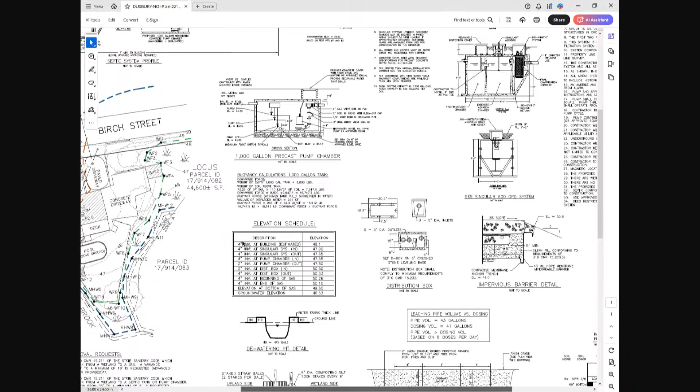Basically, we went out there and did some test holes, 2 test holes here, and got a 3 or 4 minute perk rate. It's relatively sandy material, and so now we're speccing out a singular advanced treatment septic tank right here, and then we're also proposing a pump chamber just to achieve water table separation.

We're proposing some erosion control. And basically the way the system is designed right now, it's a couple feet out of the ground, and we're requesting multiple variances or local upgrade approvals and waivers from both the state code and the local code. If you want, I can read through those individually.

We're requesting a setback reduction for the leaching field to a wetland from the required 50 feet to 19 feet. Just to be noted, advanced treatment and an impervious barrier are proposed. So we will be getting that advanced treatment, and then we have an impervious barrier right here. And it's actually the setback to the chimney — to the actual foundation it's a couple more feet, but to the actual chimney it's 7 feet.

We are requesting a setback reduction from the septic tank to the wetland. The requirement is 25 feet; we are requesting a reduction down to 8 feet, which is this dimension right here. That's also the setback to the pump chamber. Again, this is where the plumbing comes out of the house now — the plumbing goes under the slab. We have no real plumbing options, so we're just kind of stuck with that, unfortunately, so that's where the pipe comes out. By default, that's where we sited the advanced treatment tank as well as the pump chamber.

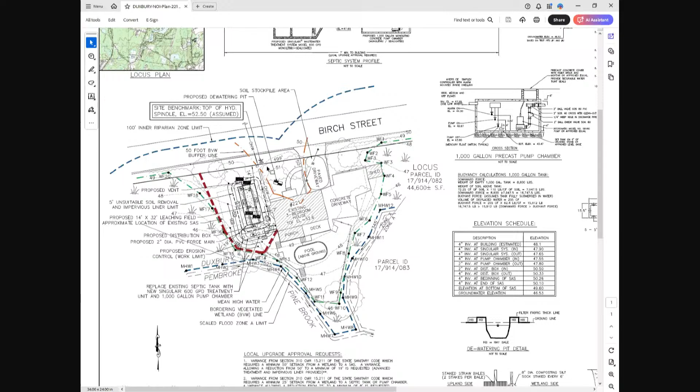I just have one question. Was the existing septic failing, or was it part of a home purchase? No, it's a failed system. The person I'm working for just purchased the home.

So it didn't pass Title V? It did not pass Title V, yes, that's correct. It's basically an old pipe and stone system, this is it here, that dashed line there. So that system doesn't pass inspection, but it's like literally 2 to 3 feet off the wetland. So now we're putting in something substantially better with advanced treatment.

And the other thing is we are going before conservation on Tuesday next week.

Is there anything on this list that you can make more conforming? And if there is, why didn't you? Like I said, the one thing that I mentioned is we are taking the 1-foot water table separation reduction, and I had already explained to you, so this is, let's see.

Right now the system's approximately 3 feet above the ground level, and we're kind of struggling with the grading. There's a swale here, and then we have another swale here. We're getting to the point where if we bring the system up another foot, we'd basically have to put a retaining wall in here, and we're right up against the house.

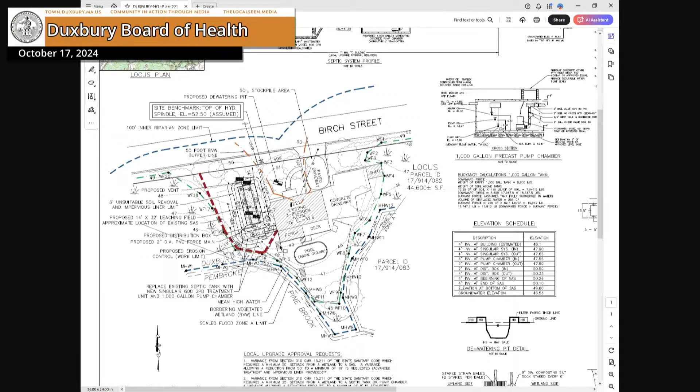If I may. Typically, a lot of boards will make the approval subject to conservation approval. But typically, when you go to conservation, they want all obtainable permits in hand. What I've seen is a happy medium: as a procedural matter, DEP would prefer to see all available permits in hand before you go to conservation, so they know the Board of Health is okay with it pending their approval. That's the sequence of events I've seen in the past, which from a practical standpoint makes sense. It'd be good to go to conservation and say we have your Board of Health blessing pending, making sure conservation's okay with everything.

And I guess in terms of the existing system that's failed, that's more of a consideration having that there in such proximity to that perennial stream. I don't know if this is something conservation is going to address in terms of nutrient loading into the stream, or if there's any consideration. Do you have a sense of the reduction that's going to happen from a failed system to what you're putting in? It may just be a consideration.

The current system's in the water table, with a standard 1,000 gallon septic tank. Now we're going from that to advanced treatment, with a 3 foot water table. From a water quality perspective, I think it's dramatically better than what is there. In some cases I would not propose the advanced treatment if I didn't have to, but because of the grading and the high water table, I thought introducing the advanced treatment was a good move.

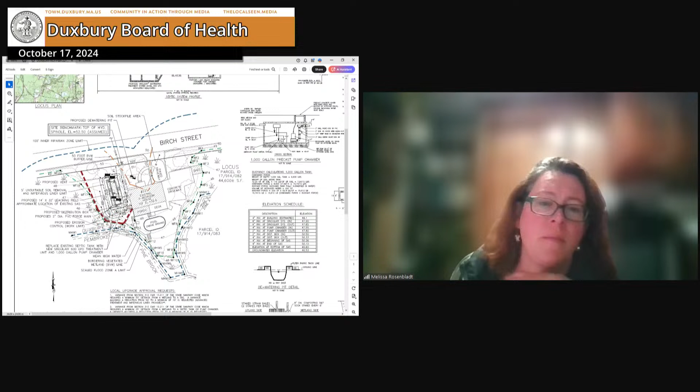The advanced treatment will address existing water quality concerns associated with a failed system. We do the best we can in the tight space you have there.

Just have a couple questions on the impervious liner. So that goes around the whole system, it looks like? Yes, that goes around the entire perimeter. Okay, and what depth will that go to?

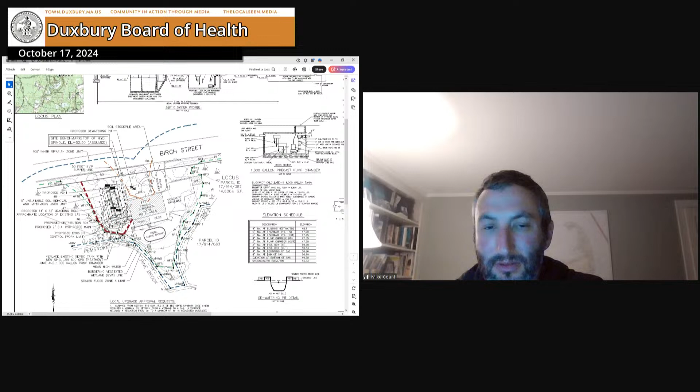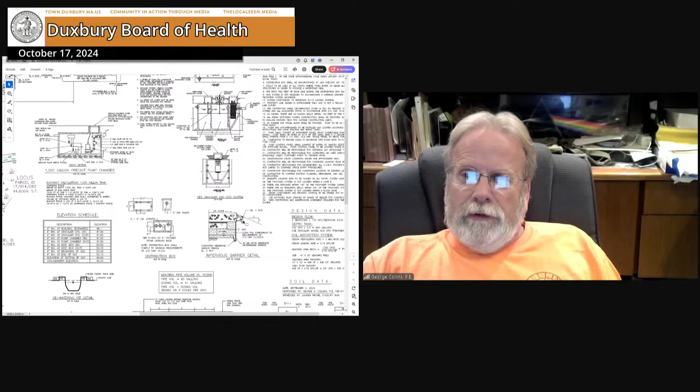That goes, there is a detail on the plan. Basically the code requires that it actually go into the water table. So we put it in at elevation 46.0, and the water table's at 46.5, so the bottom of the liner will extend into the water table. It also goes above the breakout elevation. Basically that will prevent horizontal migration of the effluent. Everything will come out, get treated, and be contained in this footprint, forced to go straight down into the water table, preventing any migration of effluent towards the wetland. The other purpose is to make sure you don't have any vapors or migration towards the foundation, so that's why we wrapped it around the entire system.

I'm not proud of this design, but it's just one of these things that I feel is the most practicable approach. I think we have a good balance.

The advanced treatment systems are around $9,000. They require annual inspections and a deed restriction, which by default also covers the number of bedrooms, garbage disposal, that type of thing. So not only is this something we're putting in the ground, but a 2-year service agreement is required, and the board is kept in that loop. They're required to report to the board the entity hired to perform the maintenance, and if that agreement is ever broken, they're required to notify the Board of Health that the maintenance contract has been broken. So there is a policing mechanism to make sure the system is maintained in perpetuity.

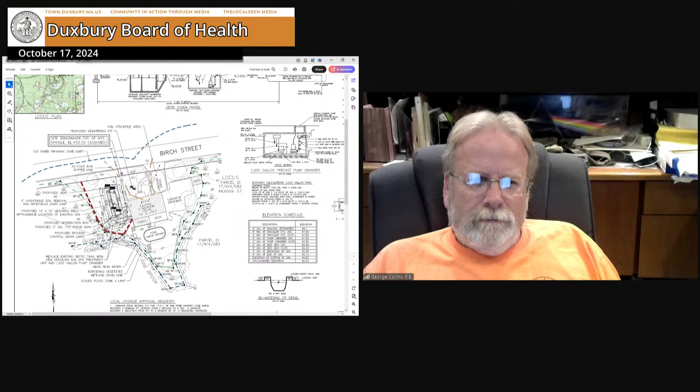Any additional questions?

Okay, I think we're okay to vote. First, I move to grant the Title V local upgrade approval to 310 CMR 15.211 to allow this construction of a soil absorption system 19 feet from a wetland, with advanced treatment and impervious liner provided, versus the required 50-foot setback. Do I have a second? Second. All those in favor? Aye. Right, so everyone approved.

Second, we'll move to grant a Title V local upgrade to 310 CMR 15.211 to allow the construction of a septic tank or pump 8 feet from a wetland versus the required 20-foot setback. Do I have a second? Second. All those in favor? Aye. Let the record show it's unanimous.

Number 3, move to grant Title V local upgrade approval to 310 CMR 15.211 to allow the construction of a soil absorption system 7 feet from a foundation wall versus the required 20-foot setback. Do I have a second? Second. All those in favor? Aye. Let the record show it's unanimous.